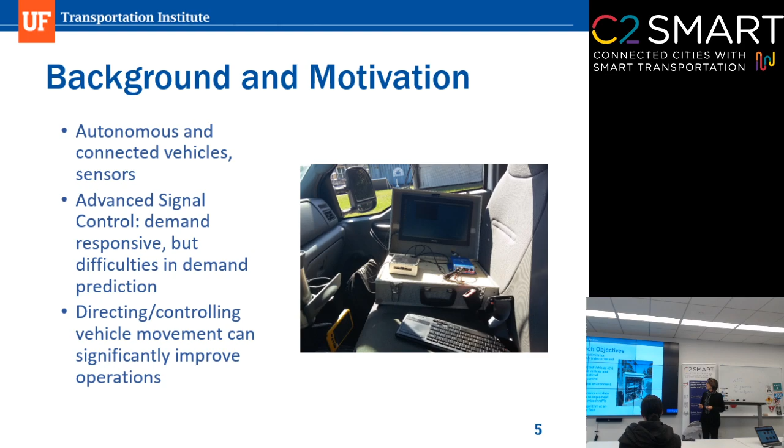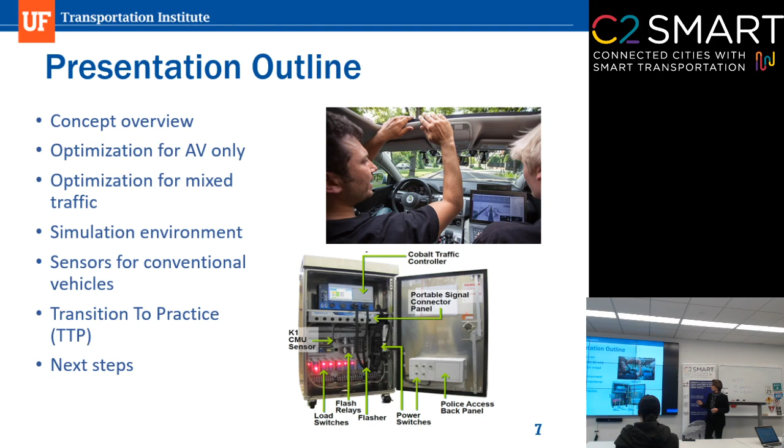So, like I said, the objective is to develop optimization algorithms that take advantage of automation and connectivity, and to develop a simulation environment, so we're able to test the way the algorithm would work under a variety of scenarios, and then prepare the algorithm for installation in the field. And the sensors and sensor fusion are a big part of how this can be done. So I'll talk about each of those components in a little more detail.

This is the concept overall and how it is implemented. We have vehicles that have the capability to be autonomous and connected, so they have both in one vehicle, and they are able to send and receive information, so they can receive optimal trajectories. Connected vehicles are able to exchange information about their location and so on, but they are able to execute that trajectory only to the extent that the driver is willing to accept the recommendations.

And then with conventional vehicles, we have to have a way to detect them and incorporate that into our algorithm, and we can kind of predict where the vehicle is going to be in the next time period, but we have no control over that. So the information we're collecting is through LiDAR, radar, video, and DSRC. All that is being fused, and this is what the computer science group has been working on. Based on the sensor fusion, we're able to get the best estimate of vehicles' location.

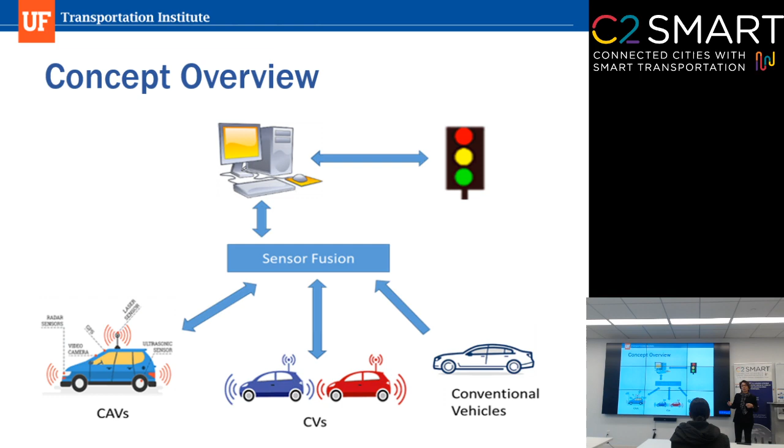The information on vehicle arrivals is the input into the algorithm, and the algorithm generates optimal signal timings, which go directly to the controller for implementation, and then optimal trajectories, which are transmitted to the autonomous vehicles, which can execute them accurately, and connected vehicles, which receive recommendations on what those trajectories would be. And this is the data flow and the information that is provided from one component to the other.

And I'll have to tell you that one of the major challenges in doing this is that you can do this in simulation, but when it comes to actual hardware and software, it's much harder to make sure that all those communications happen. For example, getting the information from the algorithm into the controller requires several steps in coding to make sure that you send the information in a format where it's going to be recognized.

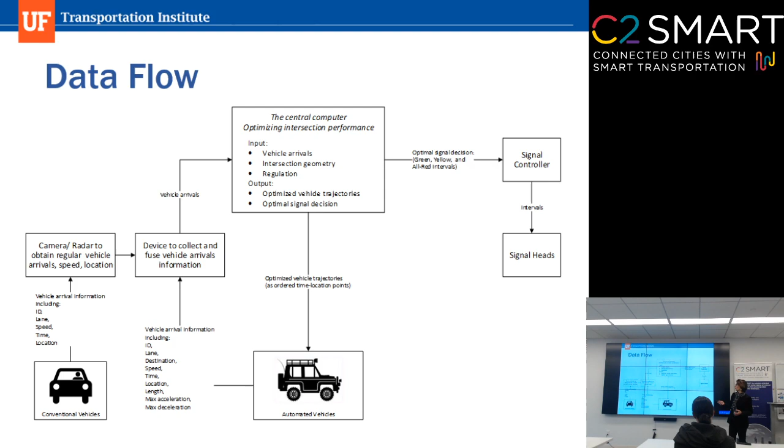A few words on the optimal trajectories. When you have a vehicle arriving, in order to provide an optimal trajectory, you need to know where the vehicle is going to go. And of course, if it's going to turn, you have more constraints in terms of the maximum speed the vehicle will have as it's turning, versus if it's going through, where you can maintain a maximum approach speed.

So when we first started developing the algorithm, we started from a very, very simple two-approach intersection, only through movements, and complete enumeration for optimization. And you can do that if you only have two movements and only two phases. It was a challenge even to create that optimal signal control and trajectory information. Then when you have turning movements, you increase the complication, because now, like I said, you have to have the intent of where the vehicle is going to go, so that the trajectory you provide is going to have a maximum speed.

So the way we are setting up the trajectories is in a way where you can have the vehicles departing from the stop bar at the minimum headway and at the maximum speed, which would correspond to the particular movement. In this way, you maximize the throughput. Is everybody familiar with saturation headway, what it is?

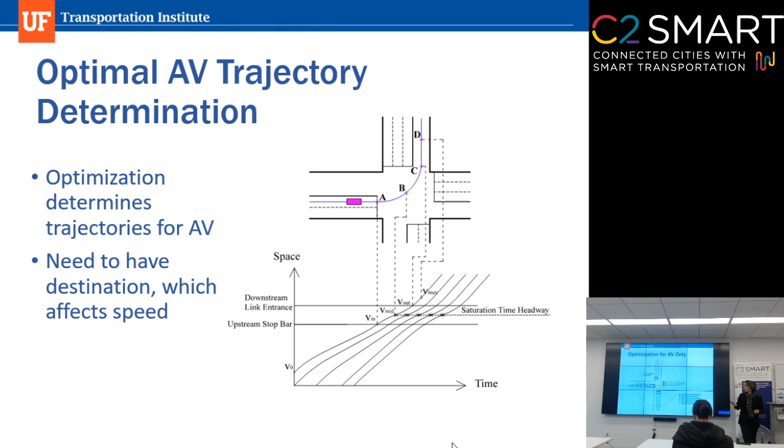So the first example and results I'm going to show you deal with a four-way intersection with turning movements. This was simulated initially for 100% autonomous vehicles, so all the vehicles are able to execute the trajectories as they receive them. In that situation, you don't need the conventional signalization. You can just optimize the vehicle movement without accounting for things that we have for conventional vehicles, the yellow and all that.

By the way, at the time we were starting with this, there was another group at the University of Texas working on a reservation type system, where the vehicles, as they were approaching the signalized intersection, would send a request to the intersection to use a particular area. If the location was going to be occupied, they had to change their trajectory. We've done some interesting comparisons between the two. The difference in ours is, as I said, we are providing optimal trajectories to the vehicles.

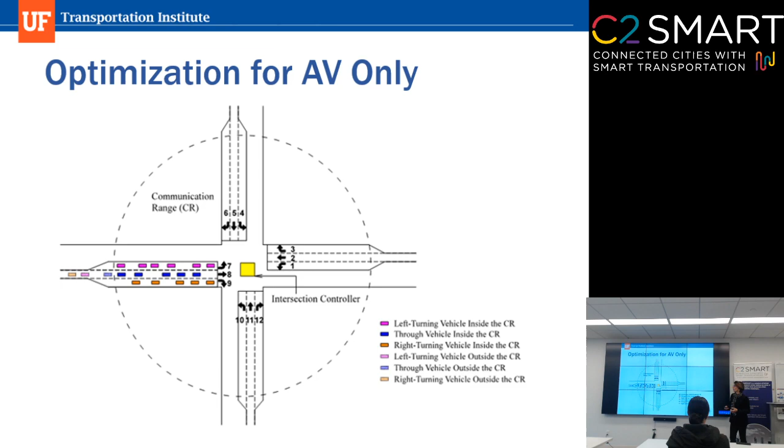So the overall algorithm in this case, and it was developed, the optimization was based on genetic algorithms, was based on calculating the trajectories of a lead vehicle versus trajectories of following vehicles.

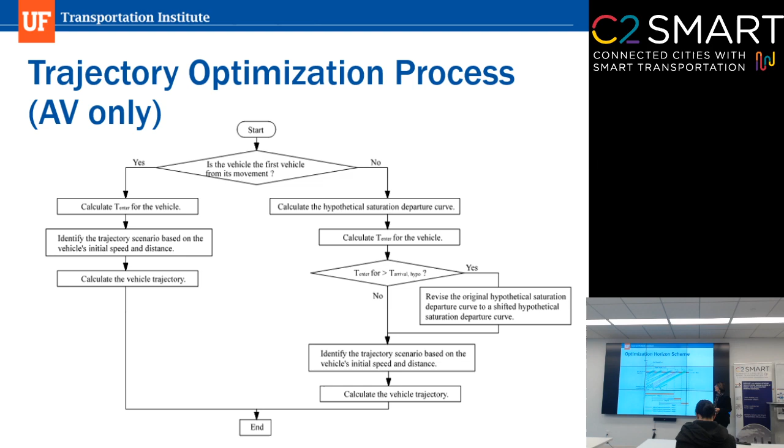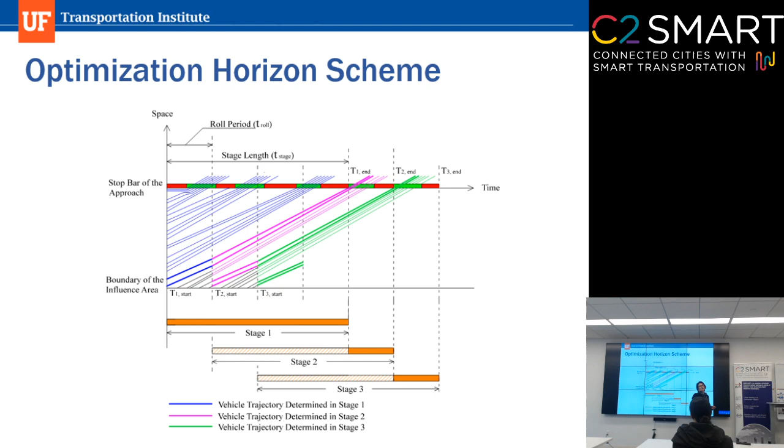But that's the idea. And then the departure headways, as you can see, are grouped during the green. So for a particular set of demands, you can manage so that vehicles don't have to stop. You are adjusting the trajectories and grouping them so that they can depart within the green. And again, you cannot do that with infinite demands, right? You can get up to a maximum of whatever your headways allow, the minimum safe headways that you have set, and the demands from the different movements.

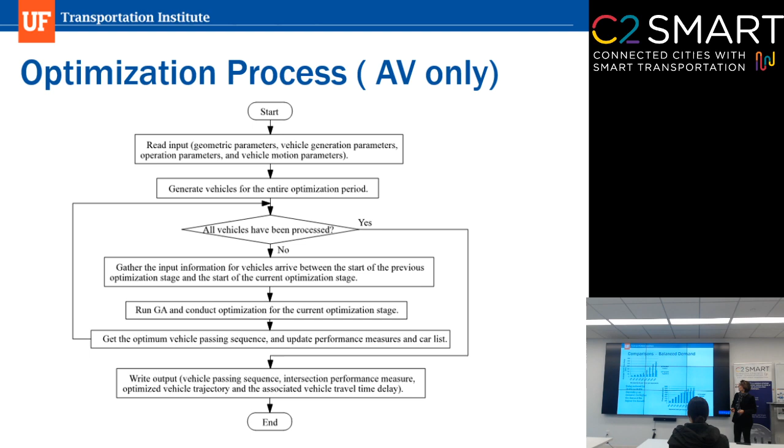So the optimization process, again, this is for autonomous vehicles, is based on a genetic algorithm-based optimization. And I'm going to show you some results. Again, keep in mind that this is all 100% autonomy.

Keep in mind that this means, though it's 100% autonomy, that means no yellow. So you're gaining some from that. Some of it you're gaining from the lost time, so you don't have lost time due to reaction and all that.

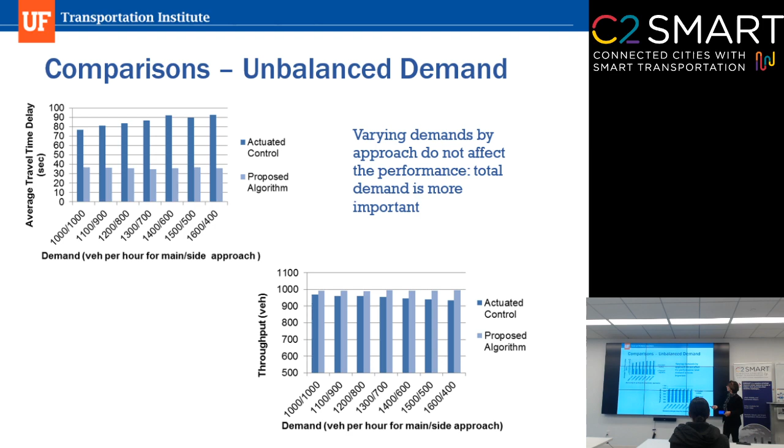This is a similar comparison, but now it's unbalanced demand. So now we have different levels of demand from the different approaches to see if that would make a significant difference. But because this is 100% autonomy, it really does not matter as much. It doesn't matter very much whether you're switching back and forth because you don't have the reaction times. It's the reaction times when you change in the yellow that lowers the capacity when you have frequent switching, which in this case doesn't matter. So very similar cases, again you have reductions in delay and increases in capacity, and the amount of total demand is what's most important.

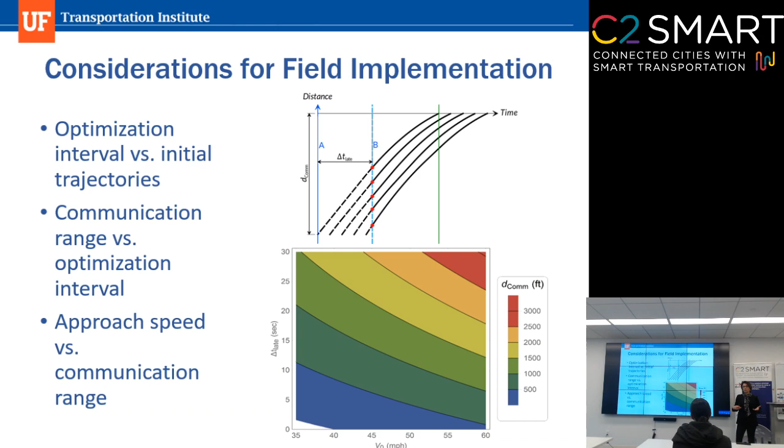When you're just simulating this, most simulators generate a set of vehicles and then process them, so this may not be obvious when you're doing simulation. But when you're in the field collecting data real time, you don't have advanced information of when vehicles are going to arrive.

So in the next stage, we adjusted the algorithm to account for conventional vehicles. In this case, if you have conventional vehicles, you have to have signalization the way we have it now. You can still take advantage of autonomous vehicles and connectivity, but now you cannot eliminate the yellow, and you still have some lost time because of human drivers. So in this case we are adding back the yellow. The concept is generally the same, but we are adding the prediction of where conventional vehicles are going to be. You're trying to predict how they're going to react after you detect them arriving in the communication range.

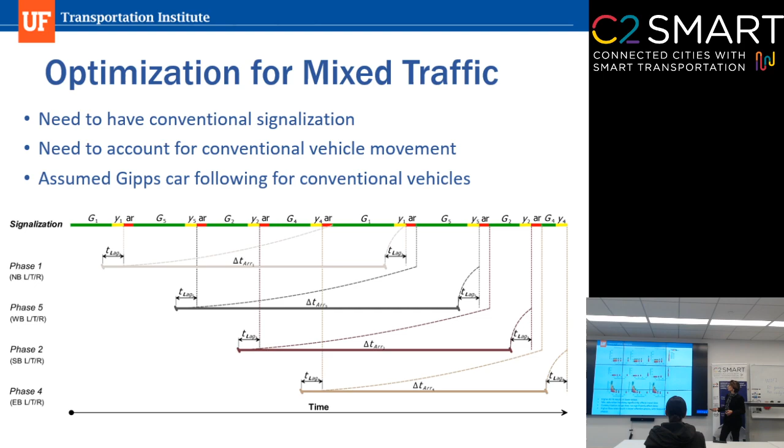This graph shows results from many scenarios where we tested several things. First, the columns show different saturation headways, so 1 second, 1.5 versus 2. The size of the bubble shows the percent of autonomous vehicles in the traffic stream, with the smallest at 0.3 and the largest at 100%. The color shows the range of communication. The top shows average travel time, the second shows delay, and the last shows average effective green.

With the travel time, if you are detecting vehicles over a communication range and you want to change that range, you're also changing the length of the link. So in order to have an equivalent comparison, we had to look at delay or travel time per mile, or per 1,000 feet, because if you change that distance, your travel time changes.

So what did we learn? First, as expected, we have much lower delays if the percent of AVs is higher, because you're able to control a lot more. Also, the saturation headway makes a significant difference in travel time. The communication range, once you go up to the DSRC range, doesn't change things too much. One interesting result was that for higher flow rates, you have more frequent changes in the effective green—the algorithm was changing the phasing more frequently than what typical control actually does.

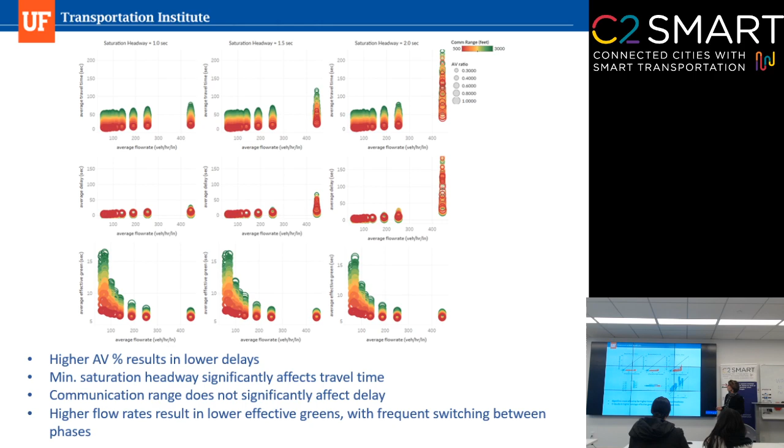This shows a comparison of our algorithm to what Vissim would give us for a similar set of scenarios. Again, consistent with the AVs, we have more benefits realized with higher demands—we're able to have lower percentage-wise delays and higher throughputs. With respect to the effective greens, because you're able to plan based on vehicle arrivals, you have fewer gap-outs, so you end up with longer effective greens.

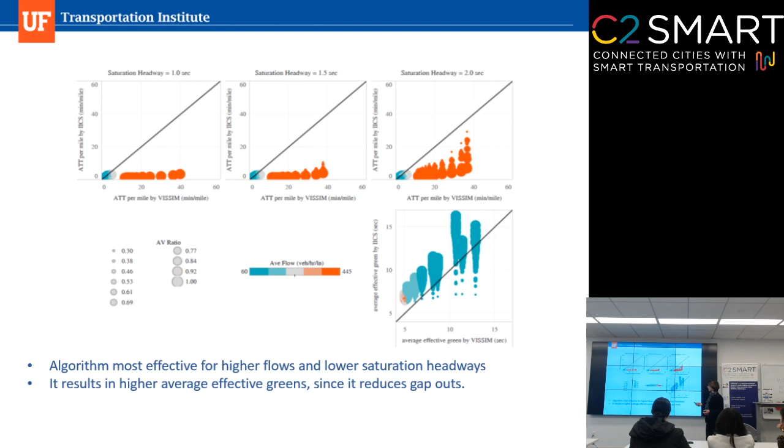I'll show you one last case study with the most recent version of the algorithm, which re-optimizes more frequently and keeps better track of vehicles so you can handle oversaturated conditions. If you optimize the way we did initially with full autonomy, you optimize once, provide the trajectories, and you're done. But if you start to have conventional vehicles, you need to take into account what you predicted they would do versus what they actually did. So we are re-optimizing more frequently based on where vehicles actually are.

That creates more complication, because now you have to track those vehicles. It's not enough to just detect them at the communication range—now you're tracking them, sending that information back to the algorithm, re-optimizing and readjusting as needed. But that also allows you to handle much higher demands, because if you only optimize once with really high demands, you may have residual queues you still need to handle. As your queues grow, you need a way to keep track of that. By re-optimizing more frequently, we're able to get better results even for higher demand scenarios.

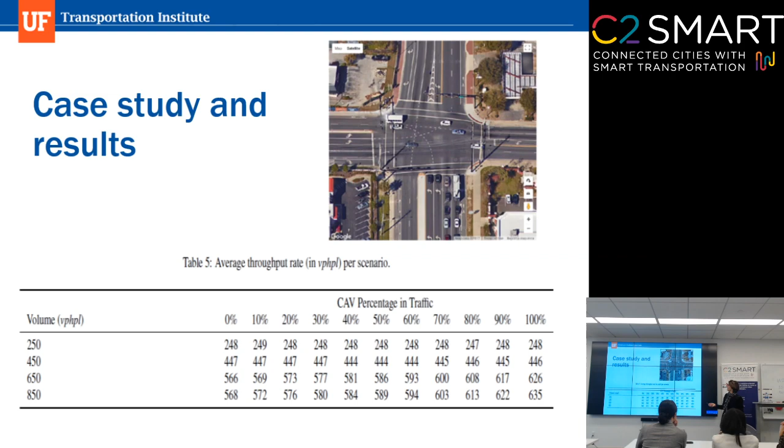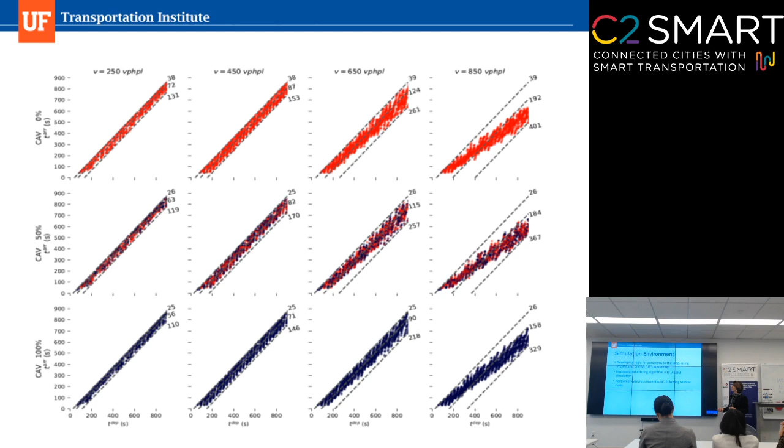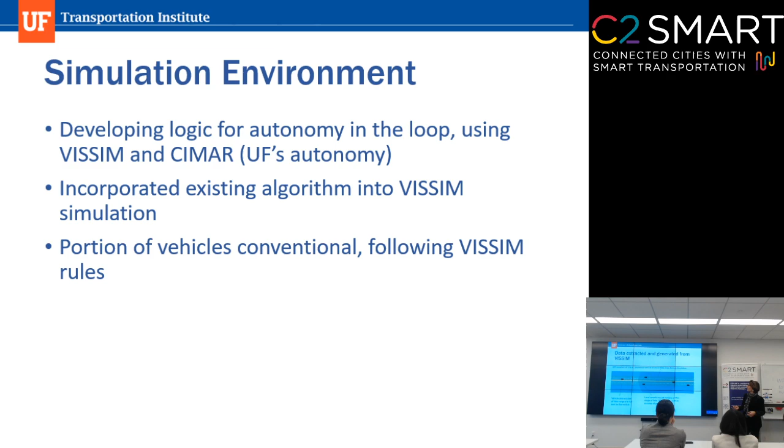So this one shows the variability. As I said, we're able to reduce the variability with the algorithm. So let me talk quickly about our simulation environment. We are simulating autonomy in the loop so that we're able to replicate not the way autonomous vehicles would function, but the way other vehicles around them would function in a simulation environment. So we are extracting data from the autonomous vehicle that we have at UF. That data is fed into VISSIM, then VISSIM operates with autonomy in the loop.

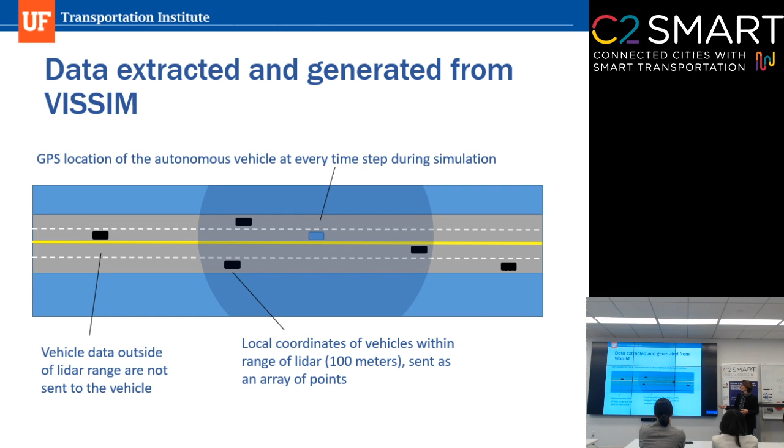It's easier to visualize in a freeway, that's why I'm showing you this, but we're doing something similar with signal control. So again, you are optimizing the movement of vehicles so that you improve the throughput. This is based on dissertation work by Clark Letter. He focused on freeways.

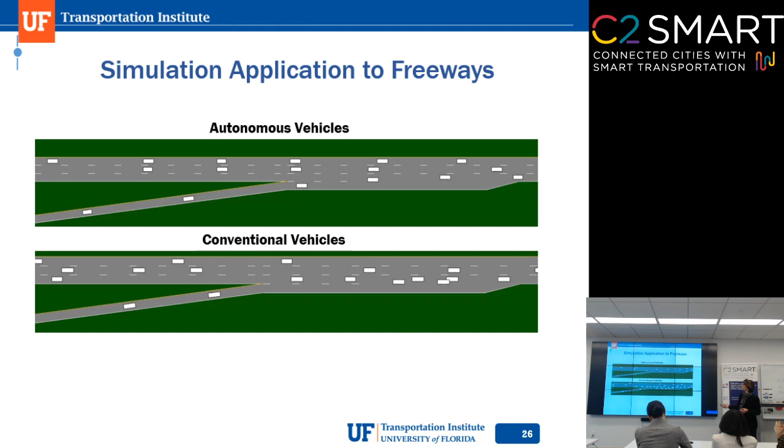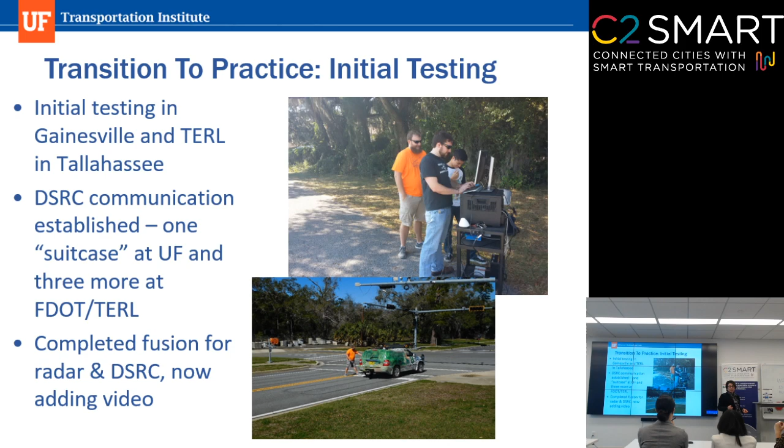A couple of words on the transition to practice. We've done some testing at the TERL lab in Tallahassee. It's an FDOT facility. And we're getting ready to do some additional testing at the TERL, and also we have installed several sensors at an intersection in Gainesville. This is the autonomous vehicle when we were testing it over in Tallahassee. And I'll show you one more video of the test we did in Tallahassee; the FDOT facility has 2 traffic lights.

And so we brought the autonomous vehicle, and that's when we first tested the algorithm in a real world environment. So we connected to our signal controller, which was connected to the traffic lights. This is the trailer where the autonomous vehicle is, and that's where we were headed. And then we used the drone just to see how things were coming together. Ideally you want the vehicle to be crossing the stop bar as the signal is turning green.

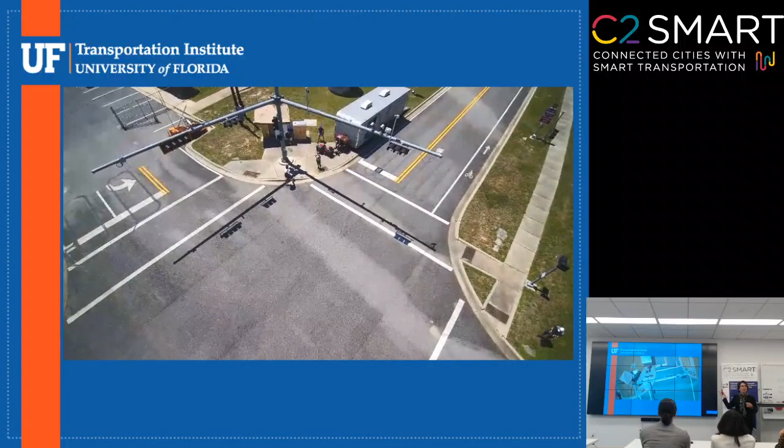This is one of our first tests. Some things worked, some things didn't. One of the issues with hardware is that different pieces of hardware keep track of time in a different way. So it took us actually a full day to figure that out, but in the end, after a couple of days of testing, we were able to make this work. So we had 6 vehicles at the time. We were able to test the hardware and the software. At this point, we weren't looking at delays or anything like that. We just wanted to make sure that things were communicating, that the controller was displaying what it was anticipated to display, that the vehicles were receiving the information and so on.

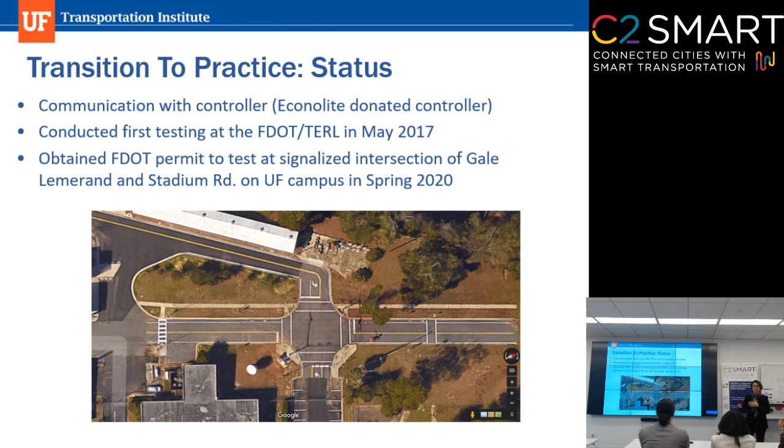And I know we don't have much time, so I'll just keep continuing here. So where we are right now is we've installed sensors at an intersection on campus, Gale Lemerand and Stadium. It's right outside our office. So we're getting ready to do some testing in the real world. We had to get a permit from FDOT to allow us to do that, and we're going to do it very carefully and really early on a Sunday morning when the campus is empty, because we don't want to take any chances. But we're doing incremental testing in closed area facilities.

And one of the issues that we're working on is the accuracy of all the sensors. I didn't really talk too much about that, but it's a big issue. How do you use the radar, the video, and the DSRC to combine this information so that you can have an accurate sense of where vehicles are? Because that's of course very significant.

One of the FDOT projects that we have going on looks specifically at pedestrians, and that's a whole different problem with recognizing pedestrians. We're trying to use LiDAR. A lot of people have used LiDAR, and they've reported different accuracies and so on. When you actually put it in the field, the accuracy is much lower than what has been reported. So what you have in the field is very different than what you're able to test.

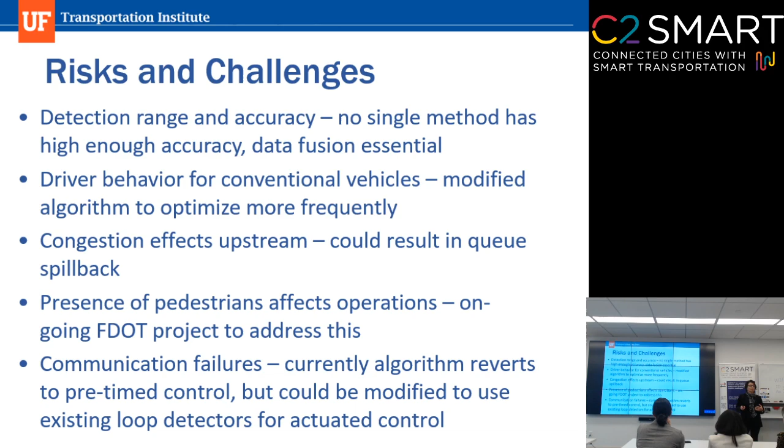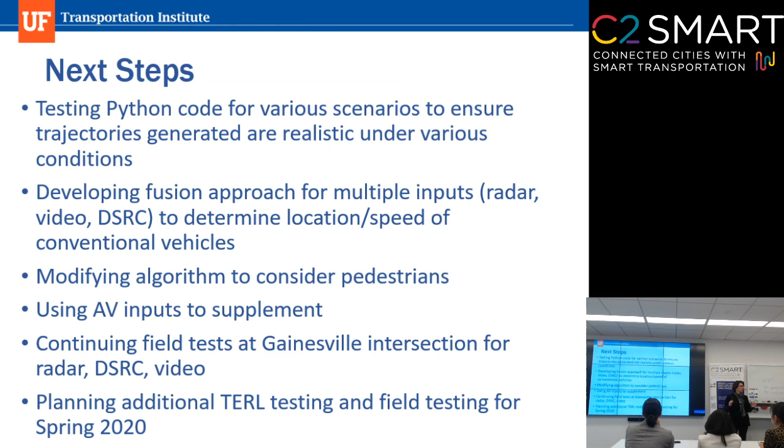So several challenges: the sensors, a big challenge, the accuracy of the communication, the pedestrians, the intent of where drivers are and where pedestrians are and what they're going to do next. The way we're setting up our algorithm is that if there are miscommunications, the algorithm reverts back to pre-timed control. And as I said, we are incrementally improving on the algorithm. We're continuing our testing, and so hopefully we'll have a full-blown test soon.